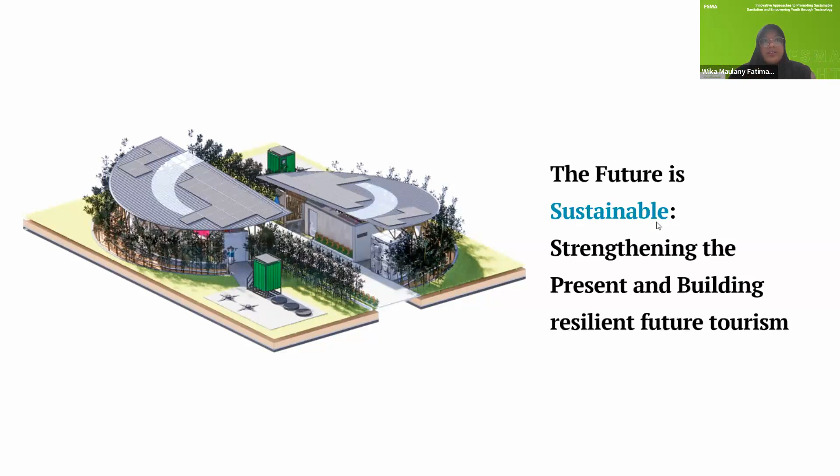But since it's far away from the crowd, it is in a remote area. And more often than not, in remote tourism areas, there is a lack of sustainable toilet facilities, which can lead to negative impacts on the environment and the local communities. If you think about it, since it's far away and probably not connected to the main city system, they will have to fend for themselves.

They will have to find local water sources that are not from the city water pipelines, and they will have to manage their wastewater discharge somehow. When they're looking for a local water source, for example, they will have to also deal with the locals regarding that water source.

More often than not, they will have to negotiate, or they will have to co-live with the locals. This is because being remote means that they are off the grid. They are not connected to the city plans, not connected to the city networks, and sometimes not only are they not connected to basic services such as water and wastewater systems, they're also disconnected from the primary road network.

Why this is important, other than access to the location itself, we'll see later with the technology we use. Onsite sanitation is about decentralized sanitation, and it will still need desludging. That's why being disconnected from a primary road network is also a problem, even if we have onsite sanitation.

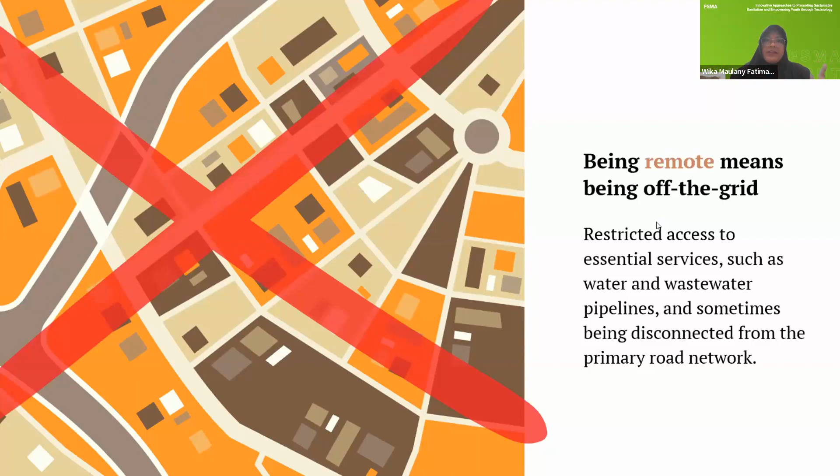Now, what are our hurdles then? First of all, if we don't manage our waste, be it solid waste or wastewater, then we're going to pollute our local pristine tourism area. We don't want that to happen, because when waste goes unmanaged, we experience environmental quality degradation: the water is polluted, the air is probably also polluted, and more importantly, the view or the location is no longer the pristine location that we imagined it to be.

As I already told you briefly, when we are handling a group of tourists, you probably won't only think of places that accept a maximum of 10 tourists a day. In a case study like Indonesia, or places where the beach or forest is up to the locals to manage, they will have to manage their own water sources. Even big corporations wanting to make a resort will also have to go to a local water source.

And if the distribution of this water source is imbalanced, then they will have conflict of interest, because we'll have to make sure that the locals get their fair share, but we will also have to make sure that the tourist destination gets the water they need to fulfill the tourism sector's needs.

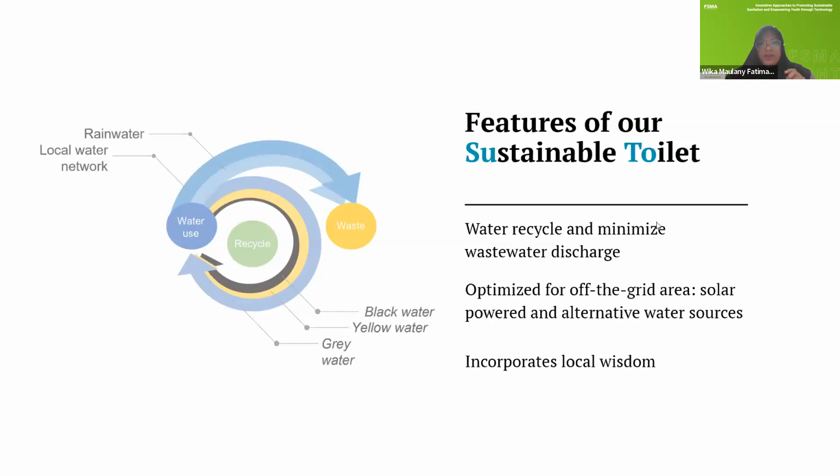So this is why I told you in the disclaimer at the beginning that this is not a very advanced or brand new technology proposal that we made, but this is about our take, our perspective on how we solve it. And that is why SUTO comes in.

So SUTO stands for Sustainable Toilet, and this is our vision—this is how we envision a sustainable toilet.

Our team for this competition consists of 4 people: Jane, Oscar, Senna, and myself. As you can see, we have a multidisciplinary background, with 3 of us being sanitary engineers.

So we have a bit of the base for water and sanitation, and we also have architecture to give insight especially on the designs and how we can make a flow so that even our design, with all this massive technology, can still fit and still be good to the eye.

And the context for our technology is in Nias, specifically in Sorake Beach. It's a tourism destination, specifically for surfing, and it is renowned as a world-class surfer destination because there are multiple international surfing competitions held there.

Why we made Sorake Beach our context or case study: we see that even in 2025, in Sorake Beach alone, they will have up to 400 visitors daily, doubling on the weekends. And in their peak hours, the water need will be increasing from the current water needs up to even 7,000 liters per day.

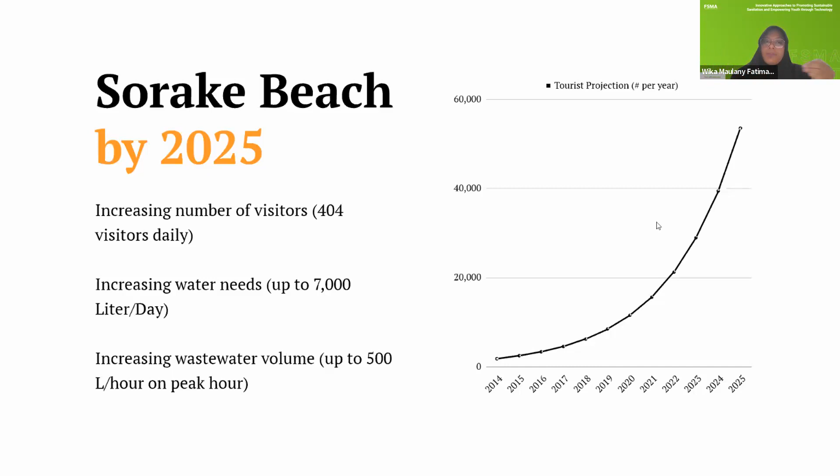Where we calculated it can be up to 500 liters per hour during peak hours.

Thinking about that, we tried to come up with a design that is easily replicated, not only at Sorake Beach but probably in other beaches in Indonesia or the world, using technologies and good architectural design that we want to promote. I want to show you three main things.

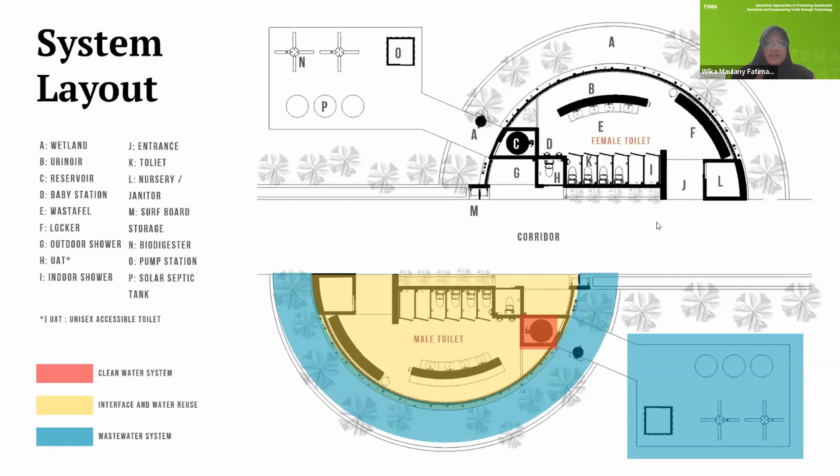The first one being the clean water system, the second one is the interface and how we do the water reuse, and the third one is the wastewater system. For the clean water system, what we want to promote is that in every toilet possible,

we try to make a rainwater harvesting system, so that other than the locally available water source, we also cater for alternative water sources. For example, even if we can't connect to the local water supplier, we can probably try to connect to a groundwater system, or we can also make a rainwater harvesting system that is scientific.

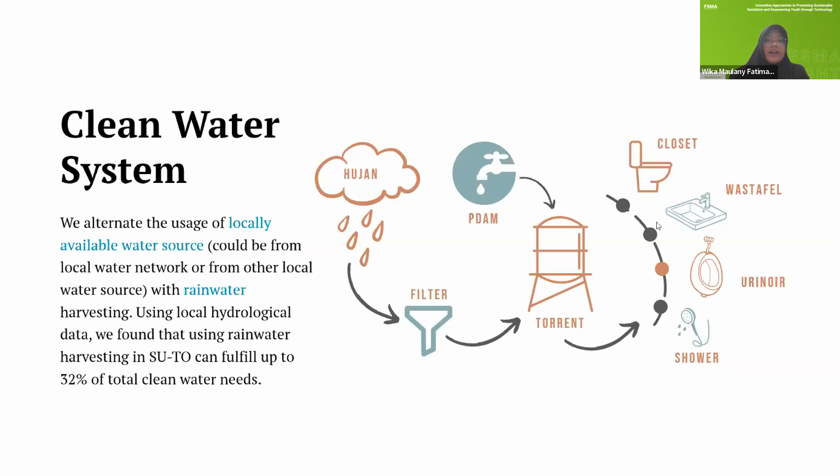From the precipitation data throughout the years, we can calculate the catchment and also how much of the water tank that we need for the overall volume. If done properly with the NIAS context, which is not very wet but actually pretty dry, even with that, using the local hydrological data and rainwater harvesting, we can collect and fulfill up to 32% of total clean water needs for 2025.

The second one that we want to promote using the system is how we change the toilet interface, and how we can try to encourage more water reuse systems, not in a very advanced way, just a very conventional or simple one, such as a toilet that has the hand washing system and the flushing system all together.

And then how about we also use water reuse for flushing, which we do from the greywater system, and we filter it.

The third one being, how about we use a UDT toilet, or the urine diversion toilet, and then we make a preliminary treatment such as UV treatment, and also a bit of filter for the urine, using urine as a fertilizer, which locals can make use of.

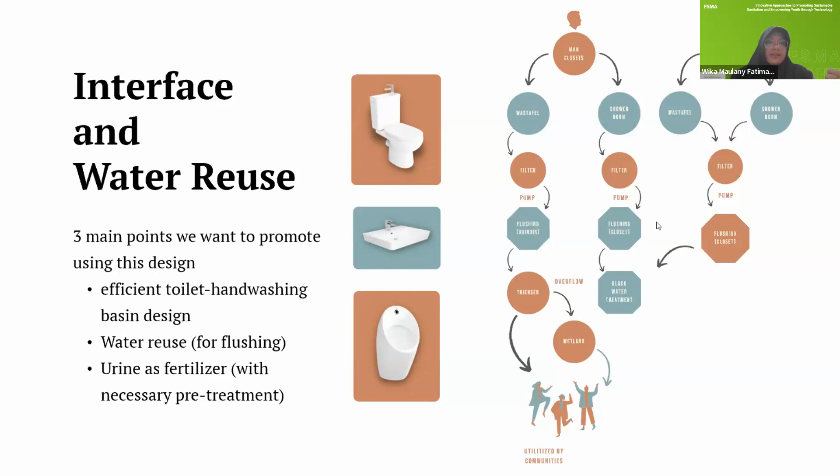The third and last one being the wastewater system. Since it's an off-the-grid system, we opt for non-sewer sanitation, focusing on technologies that yield the minimum amount of fecal sludge.

As you can see, we use anaerobic systems because they yield the least amount of total solids in the effluent and also in the sludge, so that we can reduce the amount of desludging that is needed.

We are using an anaerobic digester for that, so that we can use the anaerobic system and make it into valuable energy. The third one being functional and aesthetical added value.

That's why we are using a constructed wetland, because then we can make it just as if it's a garden for the constructed treatment wetland. We are trying to make this technology nothing new, but we want to tell you that this is possible for a sustainable toilet.

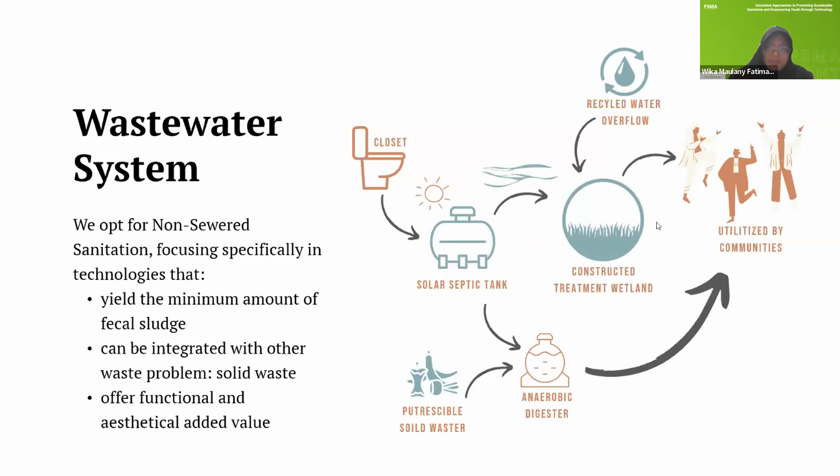This is combined with, or bound by, the architectural concept, because we don't want these very sustainable technologies to not look nice, especially since it's also a tourism destination. We want to make it as functional as possible, but also as aesthetically pleasing as possible.

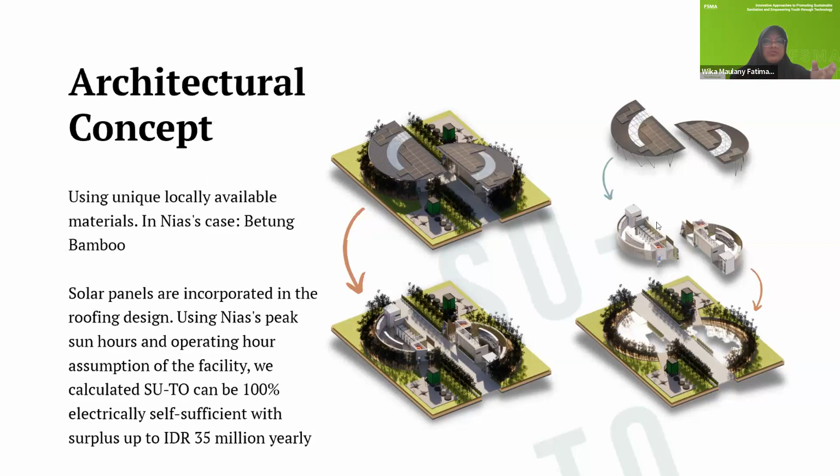For the solar powered system, we try to also incorporate it into the design for the roofing. We want to make a design that is electrically self-sufficient, with a lot of open spaces, and using solar power alone, we can also make added value from the surplus electricity, which when sold can yield a profit of up to 35 million yearly.

And that is all. Thank you for considering the sustainable options. Nothing new from our technology, but we want to promote that being sustainable doesn't always mean being boring, and that there are places that need our attention for sustainable toilets, such as off-the-grid tourism. Let's work toward a cleaner future, one flush at a time. Thank you.

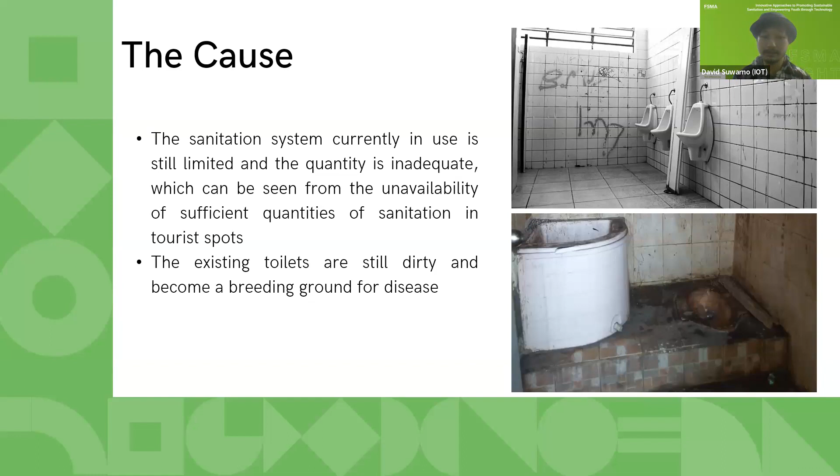The second cause is that existing toilets or sanitation are still dirty and become breeding grounds for disease. We need to keep in mind there are 17 Sustainable Development Goals, and the most correlated one with sanitation is actually the sixth one, clean water and sanitation.

But sanitation doesn't have to correlate only with the sixth goal. It can also relate to affordable and clean energy, decent work and economic growth especially in tourism, zero hunger, no poverty, and quality education. And of course it relates to good health and well-being, since dirty sanitation can cause disease and breeding grounds for bacteria. So if we have proper sanitation, we can increase good health and well-being in a certain place, region, or country.

Now, how do we bridge the gap? In bridging the gap, we have to keep in mind there is a general solution and a specific solution. The first is the general solution, based on the touchless innovation green toilet based on IoT.

The design of the toilet mainly has three components. The first component is the touchless component. Since a lot of toilets nowadays use buttons, it is basically a touch-based toilet. A touch-based toilet is actually good, but it's still a breeding ground for bacteria, since touch is one of the ways bacteria spreads to another person or staff. By using touchless technology, which is sensoric or remote technology based on sensors, we can limit touch and hence limit bacteria spreading in the toilet.

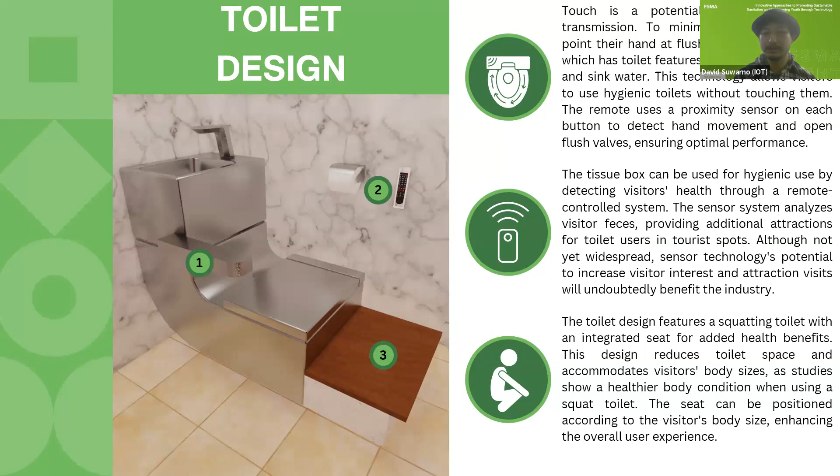By using a sitting position that also has the squatting position incorporated into it, we can give users comfortability in using the toilet, since not all users are comfortable using a squatting position toilet.

Now, the next solution is regarding the management itself. There is fecal sludge management, using wet oxidation, that uses high pressure to convert excrement into vapor during fecal refuse processing, hence reducing fecal aromas and increasing comfort for users. This improves sanitation and user satisfaction by reducing odors during frequent use, especially during high user numbers.

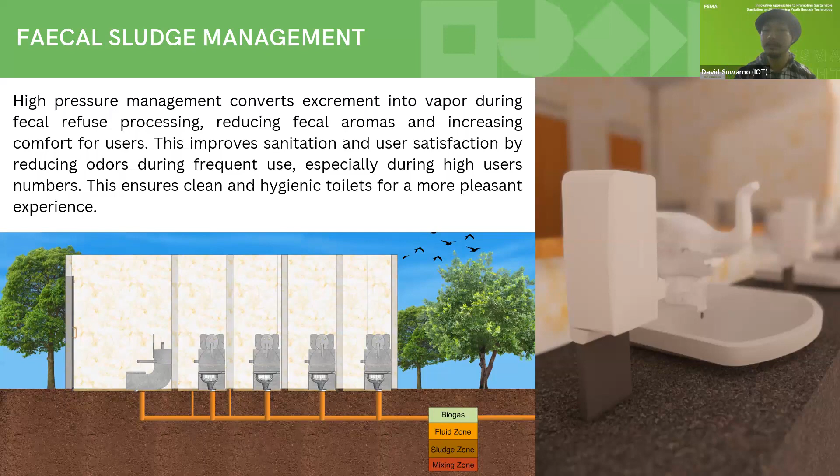This is especially true in tourism areas, since public toilets in tourism areas are usually crowded, and in fact a lot of public toilets in tourism areas usually cannot be used because there are a lot of people using them at the same time. This method of wet oxidation ensures clean and hygienic toilets for a more pleasant experience, especially in public toilets.

Now, for urine management, we have two stages in converting urine into energy. The first is using a small urinal hydro plant located near the bottom area, receiving the water from urine and using its potential energy to turn it into energy.

We need to remember that the urinal hydro turbine itself isn't really producing a lot of energy, since the quantity is little. So there is a second stage, which is a microbial electrolysis cell, which basically changes the urine into energy. This is the same process as converting food waste into energy.

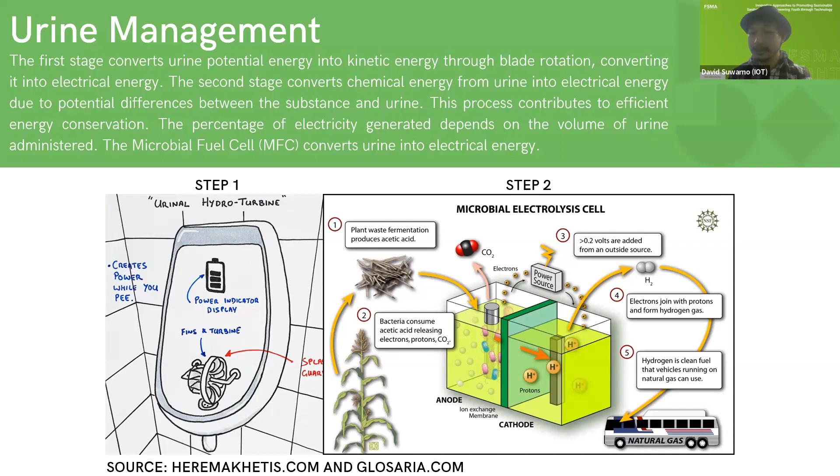Now, the third section we need to remember is basically the aesthetic part of the toilet. The previous part talked about the general solution for the toilet. Since there are general and specific aspects, the aesthetic is actually the specific part of the toilet itself.

Before we get into the aesthetic, we have to remember why location is important. The location of an area is indicative of its resources, its local cultural heritage, and also its theme or thematic places. If we do not have any context of location, then we cannot have any specification for the design itself, since a design for a toilet or any interior design needs a kind of context of the area, since everyone needs different design and has their own preference.

The location exampled here is Lampung Elephant Park, located in Lampung. Since it is Elephant Park, the design itself is modeled after the elephant, which is the uniqueness and identity of the park. We also have to remember that the position of the toilet itself is as a stand-alone building, so it is not part of any other building.

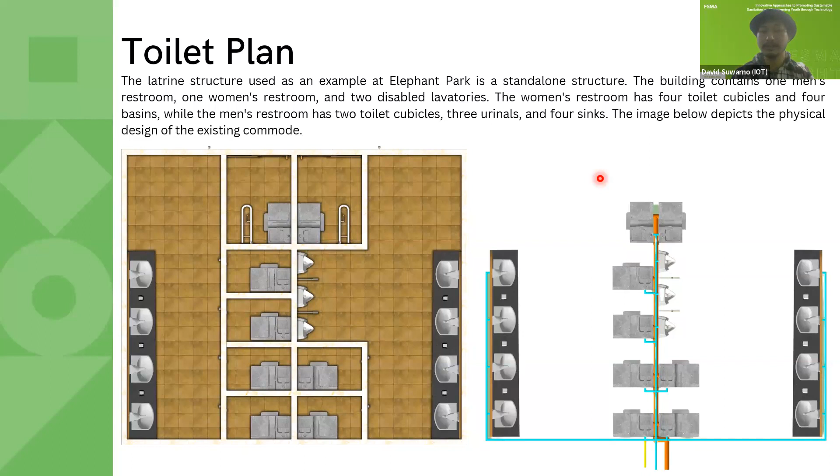The interior design itself is modeled after the elephant, as mentioned before. We implement elephant imagery into the toilet and also into the sinks, so that people can use the faucet and see that the design resembles the identity of the place, making it interesting to people. The barriers for the urinals are also modeled after the elephant.

And also, since we are using IoT, Internet of Things, instead of using tangible payment with money, either coins or paper money, we use cashless payment that is scanned by a QR code. This is to limit touch, as mentioned before, since touch is basically one of the ways bacteria spreads.

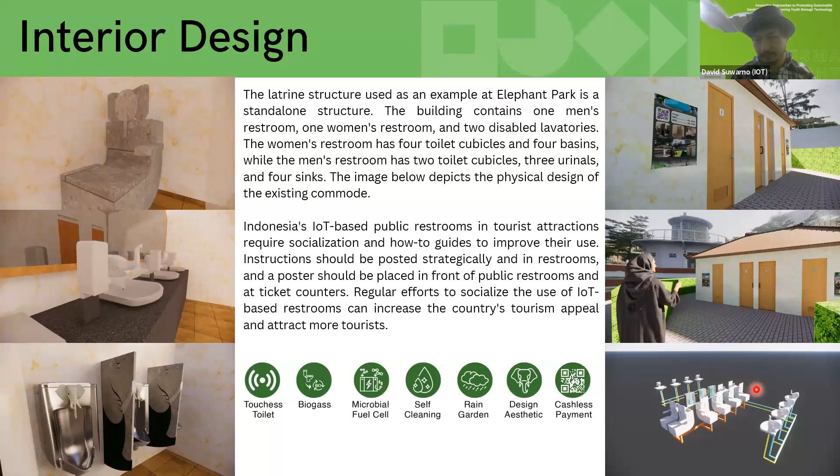Now here is the picture of the area of the toilet in the context of Lampung Elephant Park, and the last picture is referencing the plumbing itself of the toilet.

Now this video is without any audio, so I'm going to narrate a few things regarding this toilet. This is the basic design of the toilet itself.

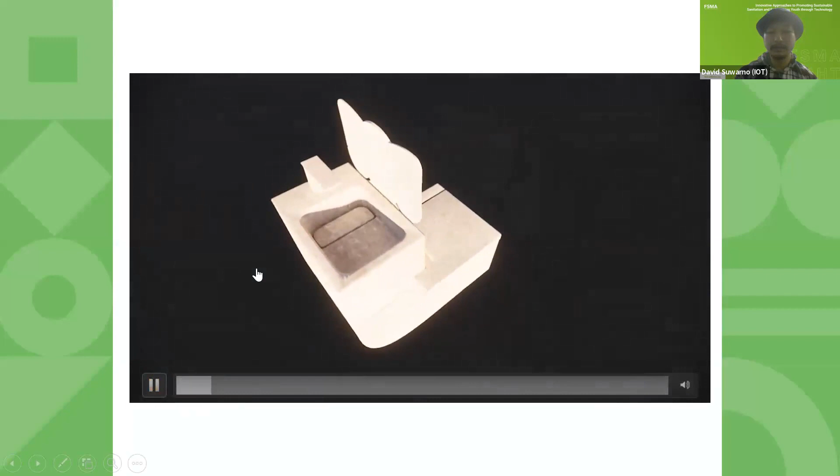It also has a sink incorporated into the toilet. Why do we put a sink right beside the toilet? This is important because the water from the sink can still be used for flushing the toilet, so the water isn't wasted immediately. This is why we put the sink into the toilet design.

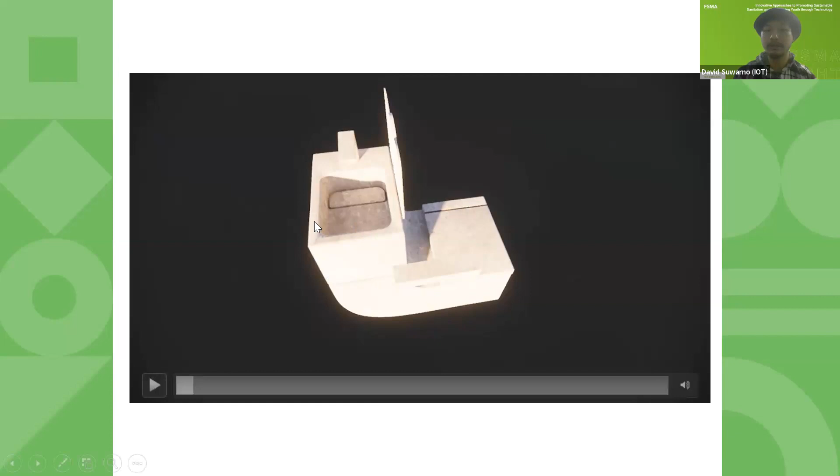The second design is the urinal design, which also has imagery into it. The third one is the plumbing, the detail of the plumbing itself. There are three main plumbing components in this.

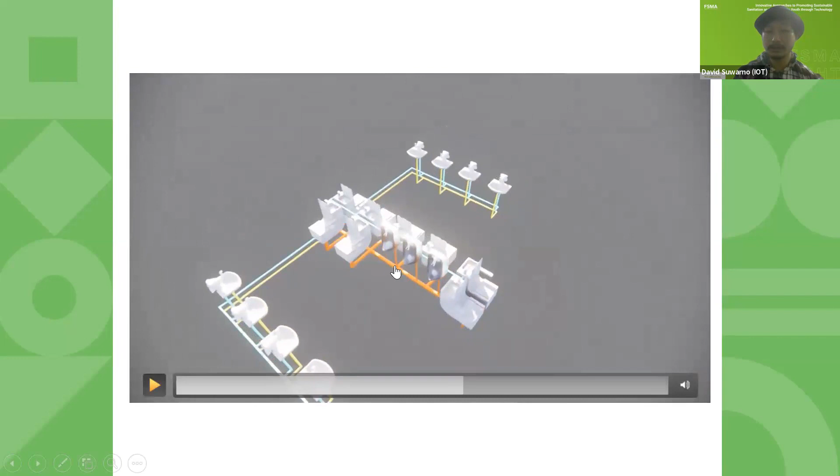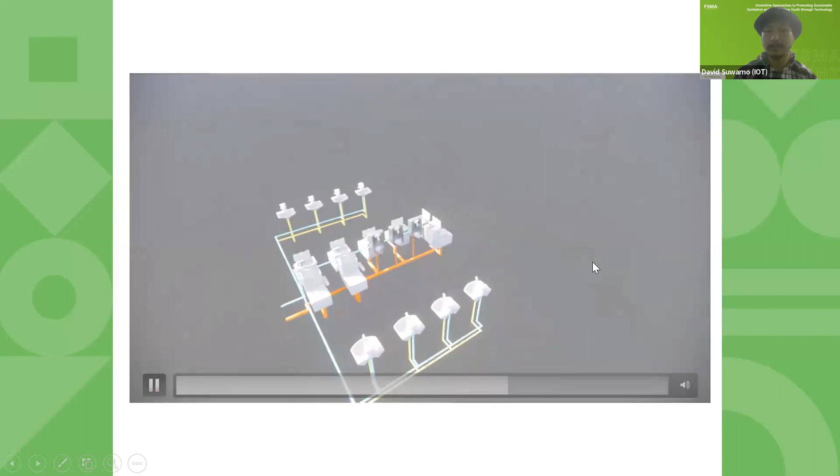The first one is the orange color, that's for the black water. The blue one is the clean water, and the yellow one is for the gray water. So the plumbing system has three pipes and three separate plumbing systems.

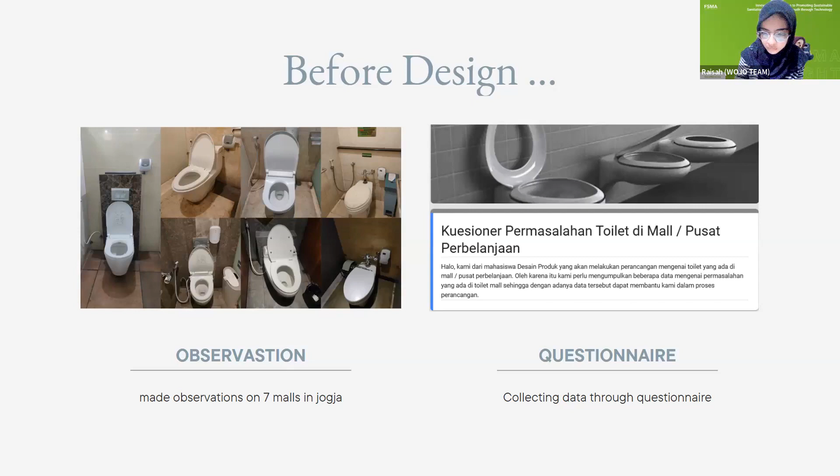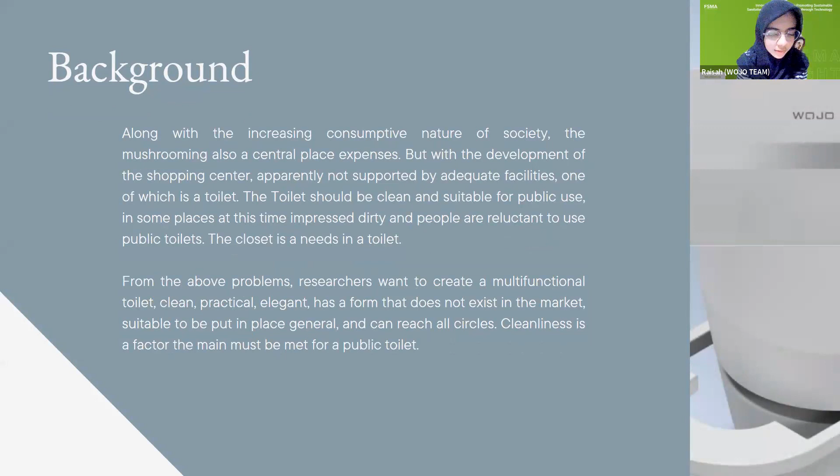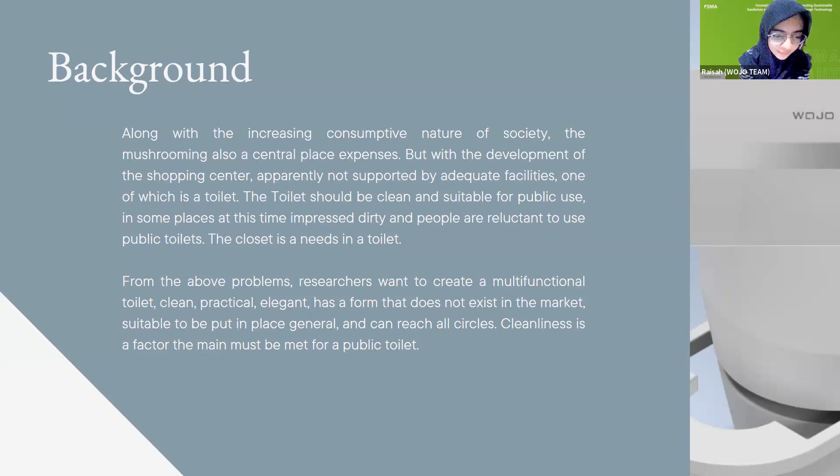From the results of our observation and questionnaire, we found the background as follows: shopping centers are often less aware of the importance of public facilities, especially toilets. Toilets that should be clean and suitable for public use are in some places currently dirty, making people not want to use them. Based on these problems, we want to make a toilet that is multifunctional, clean, practical, elegant, has a form that does not yet exist in the market, is suitable for public places, and can reach all circles, because cleanliness is a major factor to be met for a public toilet.

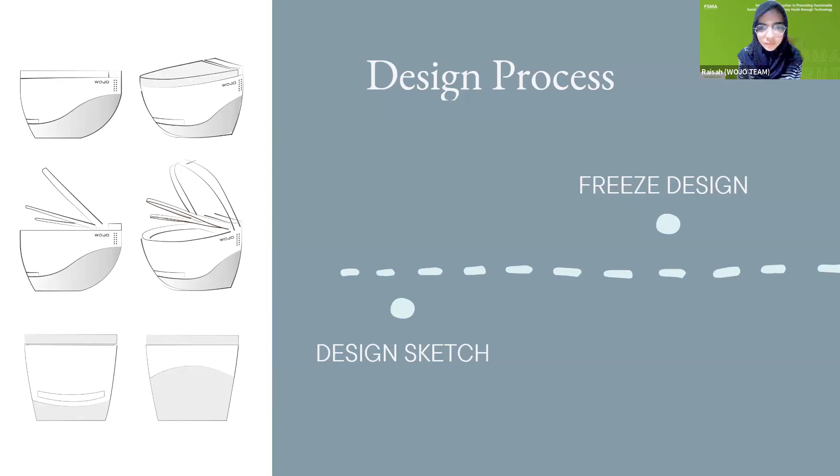Before the final design, we made several alternative designs and a selection process, until finally we found the final design, shown here in 3D rendering. So this is our 3D rendering.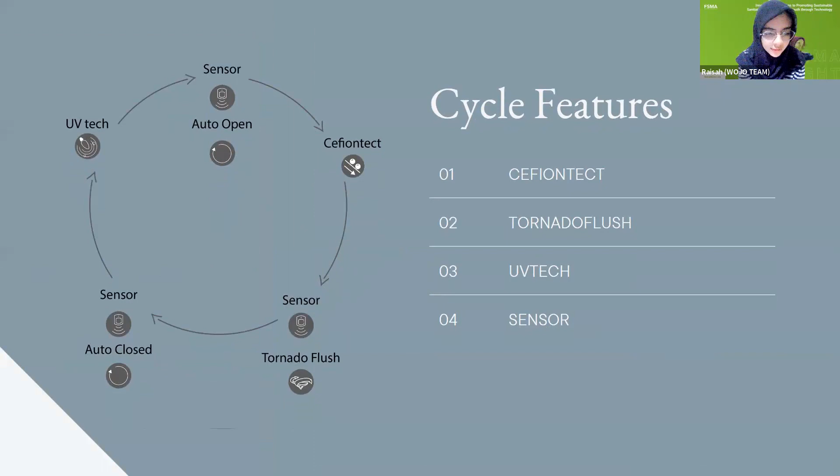Cefiontect: how it works. Ceramic glaze coats the toilet with a microscopic surface smaller than the waste particles, so there is no place for waste to rest. Tornado Flush: powerful streams of water converge and rotate 360 degrees, washing away each part with strong water pressure.

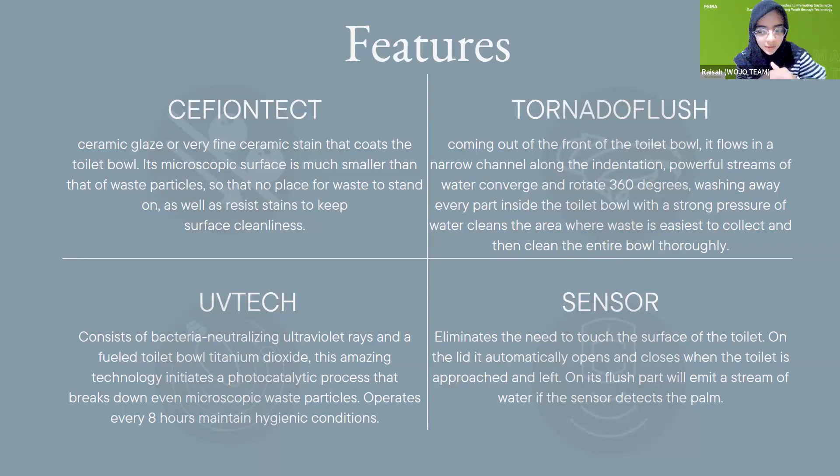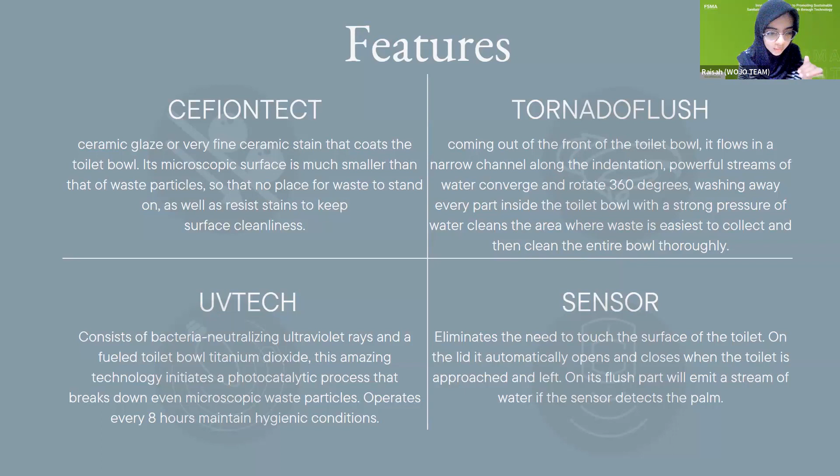UV Tech consists of ultraviolet light that neutralizes bacteria and starts a photocatalytic process that breaks down microscopic waste particles, operating once every 8 hours. Sensor: there is a lid that automatically opens and closes when the toilet is approached and left. This sensor is also located in the flush.

Here's a picture of our product use system and also an overview of the size of this toilet design.

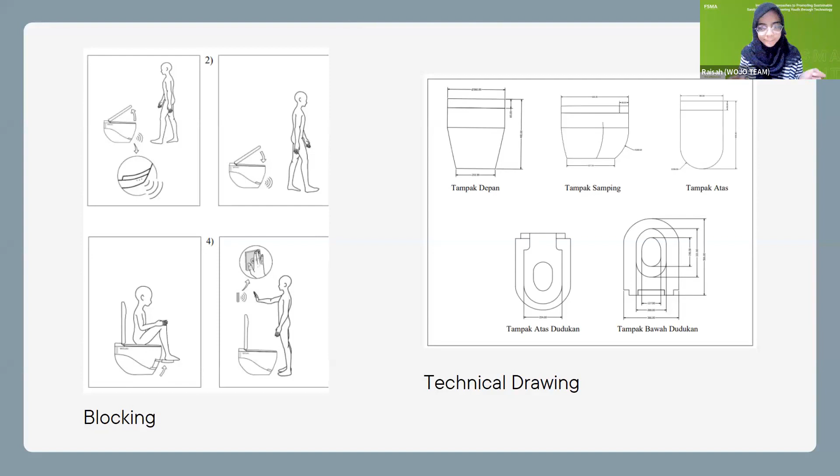In the waste treatment system, we chose to use the UOS system, which is a refinement of the AOP system in terms of design and quality of equipment and instruments.

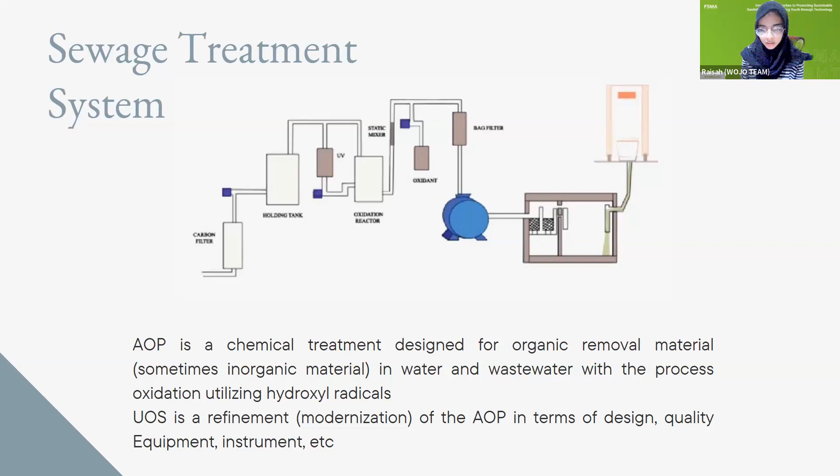For a brief description of the AOP system itself, AOP is a chemical treatment designed for organic material removal in water and wastewater, with the process oxidation utilizing hydroxyl radicals.

For the system to work, the results of solid and liquid stool will be drained into the septic tank, then processed to the UOS treatment system. From the outlet, the waste is filtered in the filter bag so there are no particles whose size is above 20 microns, because that would interfere with the oxidation process.

After that, the waste is injected with the first element, hydrogen peroxide, through the static mixer. Then the waste flows into the oxidation reactor. At this stage, the waste will circulate and then meet the ozone and UV reactor.

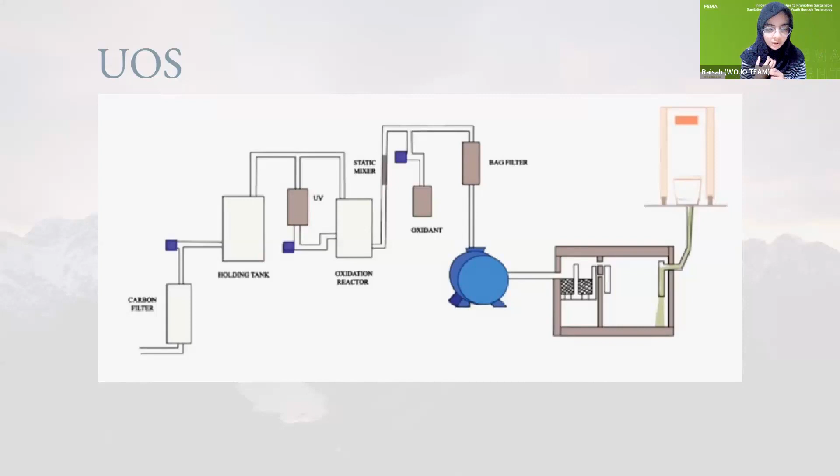Once well oxidized, the waste will flow into the holding tank. To make the result maximum, the waste is filtered again using a carbon filter. Then you get clean water that can be used to flush toilets or water plants.

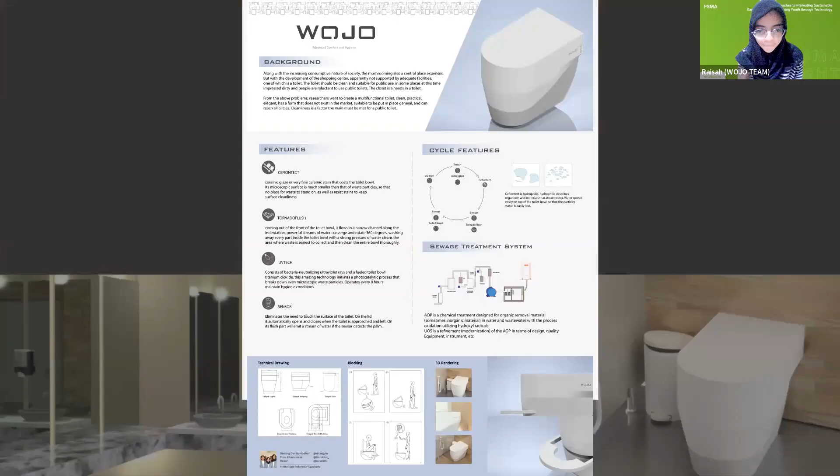This is our poster design of our toilet. Maybe that's enough. Thank you. Okay, thank you very much.

Wow, we've had 3 great presentations, so many great ideas, so many practical ways to serve people, but also innovative ideas for the future. We're very aware that these designs are context-based, so some people joining today may not be able to apply these designs to their specific context, but I still think it's a good idea and it's good to hear what people are thinking of. It's also great that we have architects and product design students here to really come from their perspective of what makes a good product. I feel like sometimes in the sanitation sector it's engineers designing these things that don't really pay that much attention to user friendliness, so I was happy to see these things portrayed in the presentations.